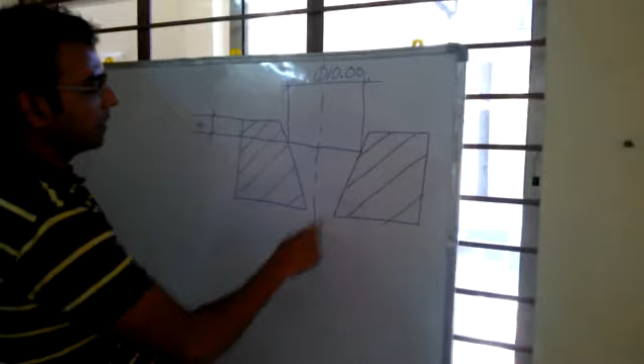And what the designer will typically do is, if you look at the section of the part, which will look like this, is the tapered bore. He will say that at a plane, a theoretical plane, which is 4 mm from say this surface, he wants the diameter to be 10.00 millimeters.

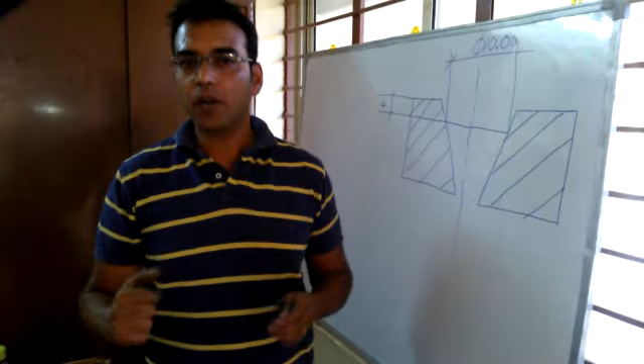And typically the way to check this in the industry is to use something called a coordinate measuring machine, which is fairly large, fairly bulky, and again prohibitively expensive machine, which costs about 1 crore on average. Another thing is that you can't use a coordinate measuring machine on the shop floor, because it has to have a clean environment, temperature controlled, dust controlled, and so on and so forth. And therefore you can't use it for every single part.

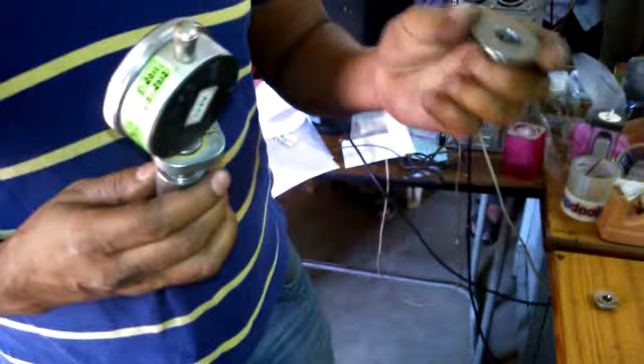So what we have done is we have developed a gauge which looks like this. And with this gauge, what we do is we have a part which is measured on a coordinate measuring machine or by some other method, and ascertained to be perfect. And then we have a gauge which we match to the part in such a way that it's completely zero, that the dial indicator shows 0.

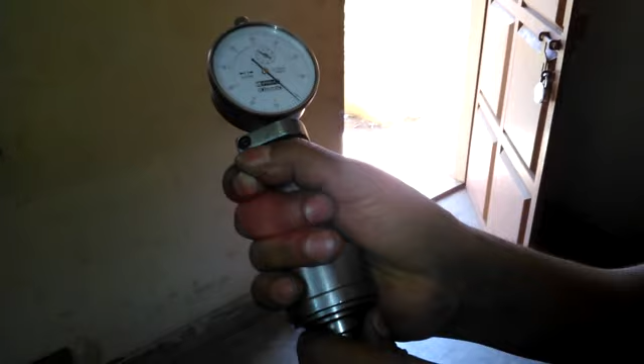And then when we are actually making the part, we check the part with this gauge, and therefore we can determine whether the part is okay. But not only that, we can also determine how much it is out by, if it is out, and then with some simple trigonometry we can figure out how to change the part and make it okay. So this is the simple low cost solution that we are using to check tapered bores.